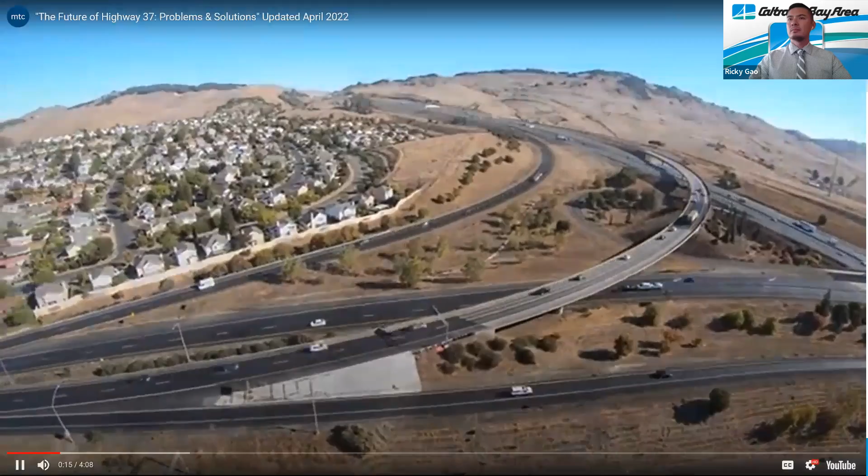Highway 37 is a critical piece of the Bay Area mobility puzzle. The 21-mile corridor connects Solano County cities and some of the most affordable housing in the Bay Area, with jobs in Napa, Marin, and Sonoma counties. Yet, the route is challenged by issues of congestion, flooding, and sea level rise, as well as limited access for bikes or pedestrians. Even during the COVID-19 pandemic, traffic flow on Highway 37 is routinely pinched by a 10-mile bottleneck.

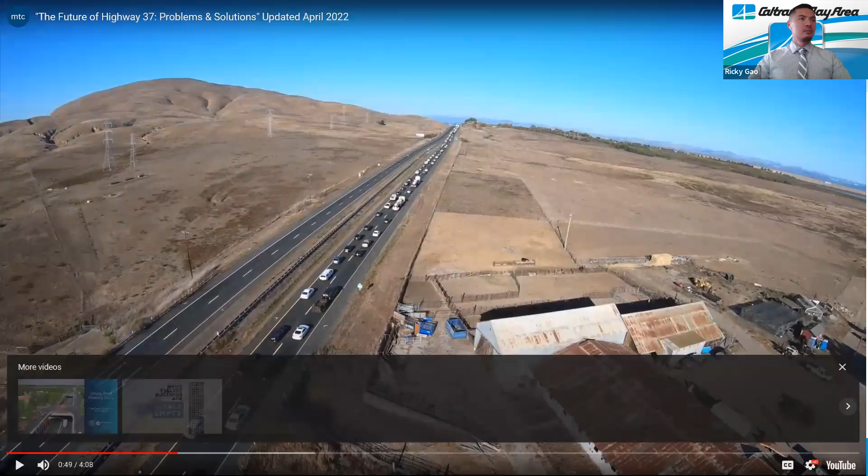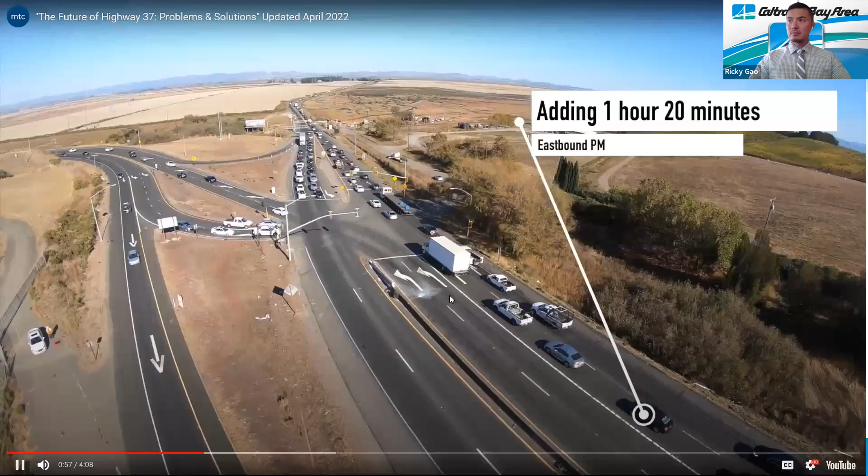This stretch in particular, from Sears Point to Mare Island, has one lane in each direction, separated by a concrete barrier, meaning westbound traffic backs up in the morning, adding up to 30 minutes to the typical commute and impacting Vallejo streets as drivers divert through Mare Island. In the evening, eastbound traffic backs up from Sears Point to beyond Lakeville Highway, adding as much as an hour and 20 minutes to commute times for some drivers, and extra safety problems for drivers who have diverted onto Lakeville Highway.

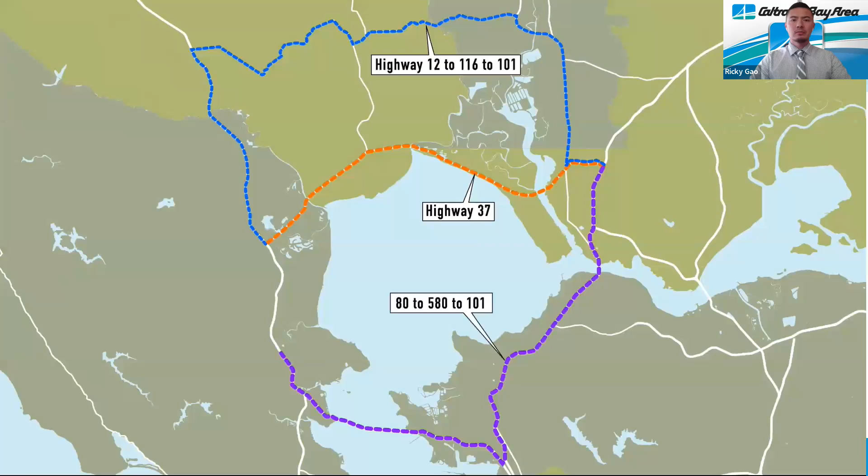There is no easy alternative to Highway 37. As you can see in these two existing options, drivers forced to detour north or south would have to travel twice as far to get from Vallejo to Novato or vice versa. A commitment to equity requires a reliable link between the comparatively affordable housing in Solano County and job markets to the west. And Highway 37 can be a viable route for future transit service only if buses can avoid congestion.

The situation can be even worse in the winter. Existing levees protect the low-lying highway from everyday flooding, but heavy rains and king tides can shut down the entire highway, as happened for 28 days in 2017 and for 8 days in 2019 due to flooding at the Novato Creek crossing. Rising sea levels will require a permanent long-term solution, but the Highway 37 team already is working on short and intermediate term improvements to ease congestion and reduce flooding risk.

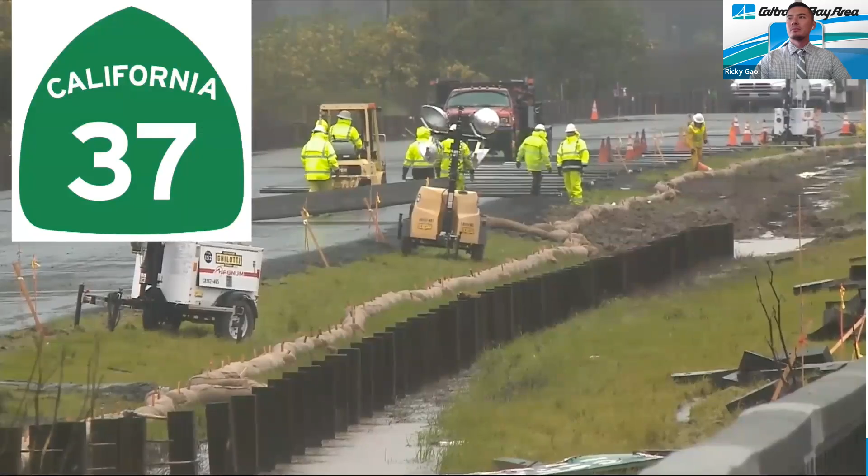On the Marin County end of the corridor, crews already have raised the pavement elevation, built concrete flood walls along critical segments of Novato Creek, installed new drainage systems, culverts, and slide gates, and acquired inflatable rubber bladders and portable pumps for deployment before major storms.

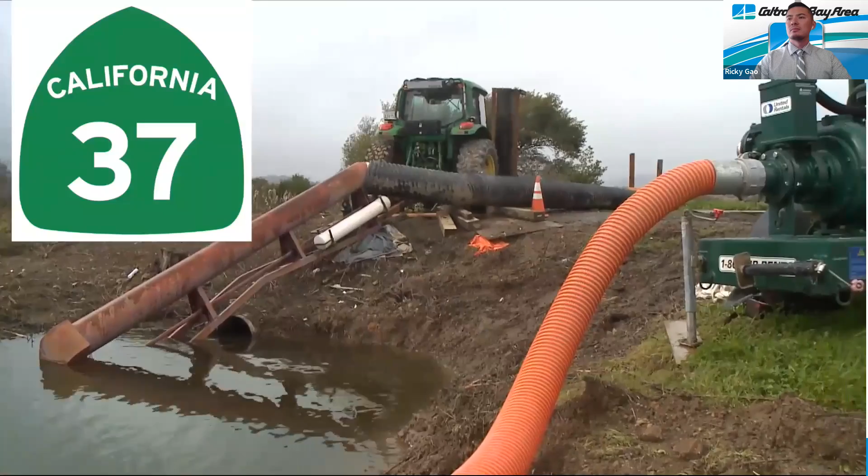Work set to begin soon includes more paving and repair work, mowing and weed abatement. The Highway 37 team is also looking at options for reducing congestion in the 10-mile bottleneck between Sears Point and Mare Island. These include a 3-lane highway with movable median barriers for a carpool lane that operates westbound in the morning and eastbound in the evening, and using the current shoulders for either part-time or full-time carpool lanes in each direction. It would take about 4 years and cost $250 to $400 million.

Challenges include avoiding impacts on sensitive wetlands and minimizing the use of any bay fill. The other big issue, of course, is money.

For both near-term improvements and congestion relief for the Mare Island to Sears Point segment, and a long-term project to completely transform Highway 37, tolls may be a practical solution that can serve as a match to secure other regional, state, and federal dollars. State Senator Bill Dodd, whose district includes nearly all of the Highway 37 corridor, in early 2022 introduced legislation that would authorize tolling on Highway 37 and would require toll discounts for high-occupancy vehicles and for lower-income drivers. What do you think are the right solutions for the Highway 37 puzzle?

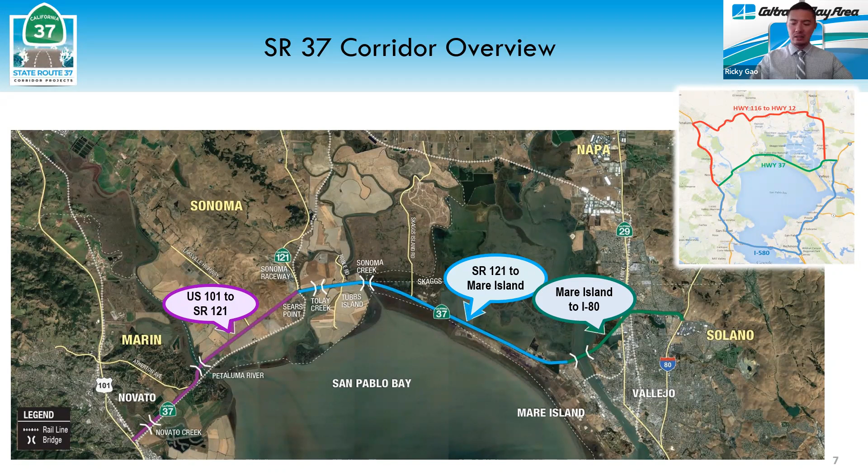And also we have a congestion issue because of the low-income communities in Vallejo and a lot of working-class travelers going through SR 37 to work in the Marin, Novato area. So there's a very high volume of traffic in the peak period causing congestion, as well as we have ecological opportunities to restore some of the lands and add connectivity to ecological sites.

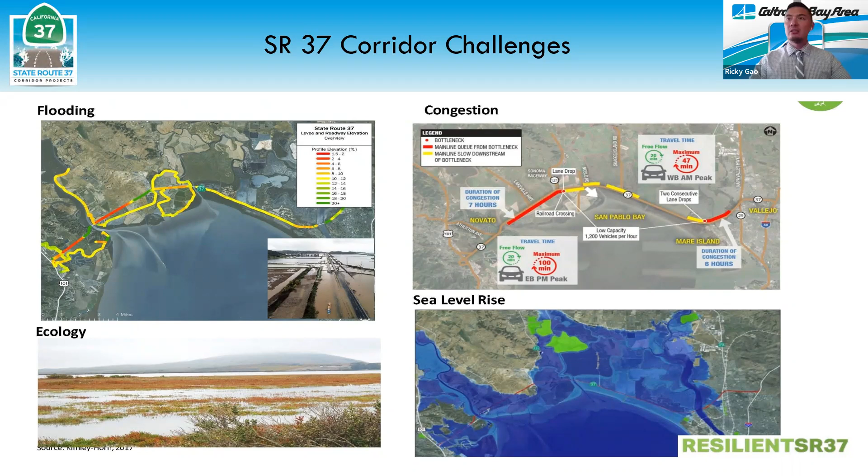So we'll try to address all the challenges in a phased implementation, as you can see on this slide. First, the team has identified several projects to deliver early benefits to restore SR 37 to a better state, from reduced flooding, to addressing congestion relief by adding transit and carpool for the Sears Point to Mare Island Improvement Project, SR 121 intersection improvements, and other smaller projects. And also we will identify ecological and Bay Trail enhancements.

Once we have done all these near-term projects to deliver early benefits, we restore SR 37 to a better state to buy us some time until 2040 or the mid-21st century for the SR 37 ultimate project, which will deliver advanced mitigation resilience to sea level rise and flooding, add bike and pedestrian multimodal transit, and also address public access and equity.

So these are the 5 benefits the ultimate project will deliver, and the ultimate project will come after the near-term project. So that's the phased implementation that the team is taking.

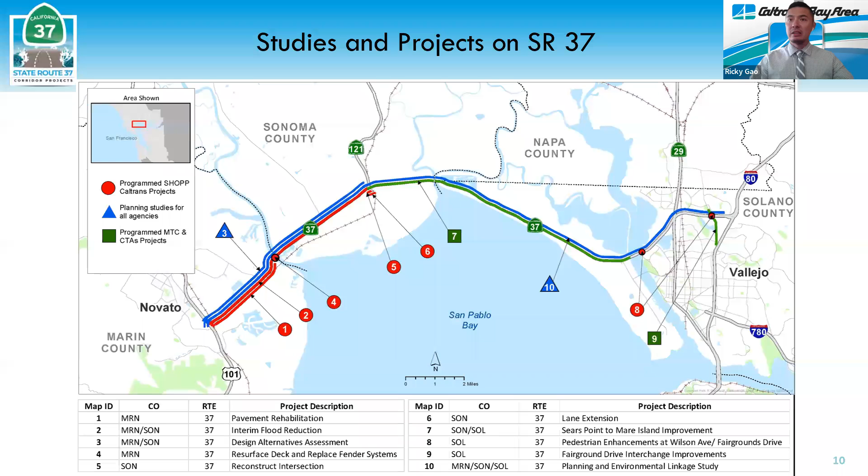I'm not going to go into the details of all the projects, but we'll mention the major ones in the next few slides, specifically the flood reduction project, the Sears Point to Mare Island project, and also the planning and environmental linkage studies spanning across the entire corridor.

So with that, I'm going to give it to Tammy to talk about the planning and environmental linkage study. Thank you, Ricky. Hello, everybody. The planning and environmental linkages study - go ahead and go to the next slide. Sorry about that, Ricky.

The planning and environmental linkages study is a federal highway initiative, and it's used to bridge the gap that often occurs between planning and the environmental review process. Caltrans is also incorporating CEQA agencies into the PEL process, and I also wanted to let you know that Caltrans, in coordination with MTC and the 4 North Bay County Transportation Authorities, are completing the first PEL on the state highway system in California. So it's very exciting to be doing this for the first time in our state.

The PEL study is considering the entire corridor with connections at 101 and all the way over to Interstate 80. There have been a lot of studies done, but they haven't encompassed the entire corridor. So that's what we're working on here.

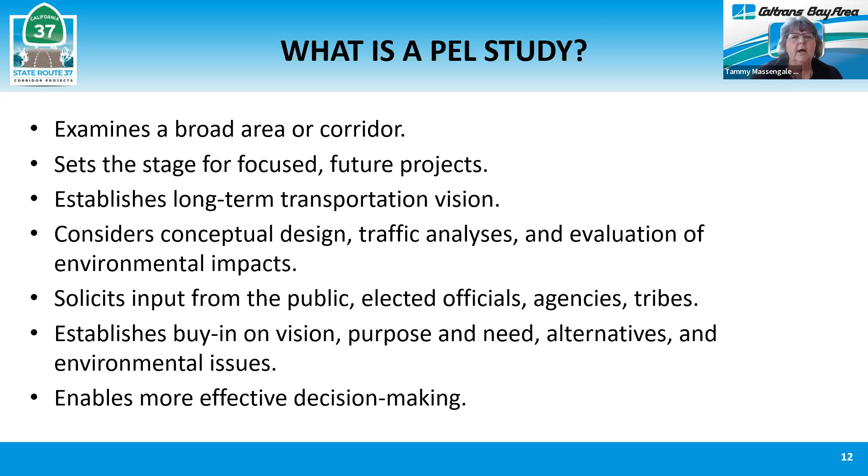Our PEL study will consider the ongoing projects in the corridor that Ricky mentioned, and the numerous studies that have been previously completed for the corridor, and we will incorporate those studies as appropriate. The unique thing about the PEL study is it actually has an implementation plan, and that implementation plan will provide a framework for streamlining the transportation improvements, the funding that will be needed, and also identifying requirements for future CEQA and NEPA documentation.

One of the studies I'd like to highlight is the MTC-sponsored Ultimate Sea Level Rise Design Alternatives Assessment from US 101 to State Route 121. This recently completed study looked at a range of alternatives on the western portion of the corridor, and using guidance from the Ocean Protection Council, they've designed the project to meet sea level rise for the year 2130, which is also the horizon year that we are looking at for the PEL.

There were three alternatives that they looked at in the study: an elevated causeway, an embankment, and a combination of an embankment and the causeway. The team assessed the alternatives against 23 different criteria, and they used a lot of input from their environmental technical working group, the resource agencies, and stakeholders.

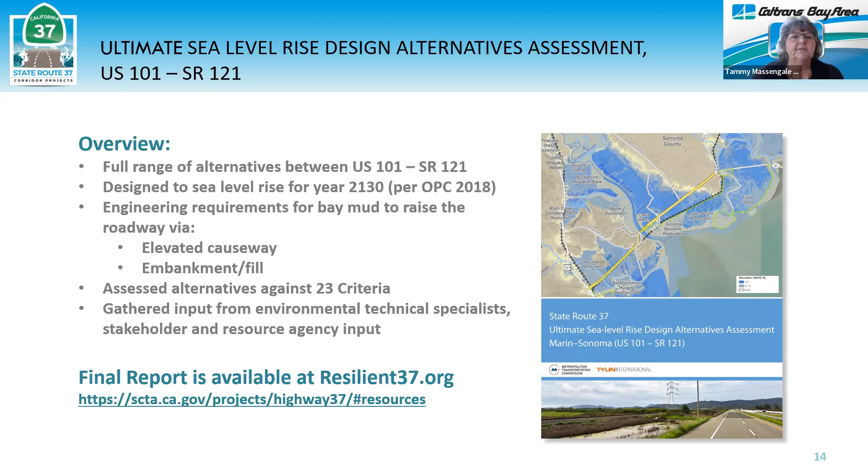Lastly, we have established evaluation criteria. As a side note, during this time, both the DAA and the PEL used the same purpose statement, so we worked together collaboratively so that we would be looking at the same type of results, if you will.

Since October, our technical working groups have been refining the evaluation criteria. We have developed the alignments that we're going to show you in just a little bit. And on January 25th, we held our second public meeting where over 300 people attended, and of those attending, about 260 were from the traveling public, which was very exciting for us.

Our next steps are to finalize the screening criteria and run the alignments through the screening process.

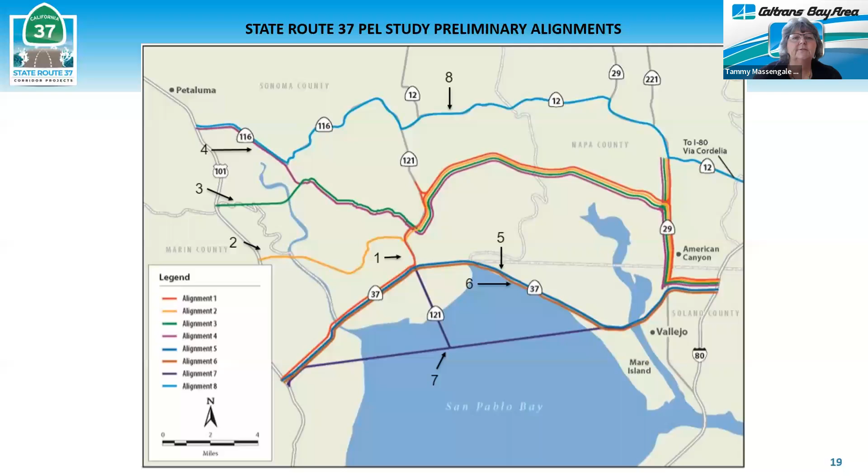During the technical working group meetings, there was a lot of discussion regarding Alignment 7. The main theme was the feasibility of building this type of structure over the bay. Since the alignment meets the purpose and need, it will be retained through screening criteria 1.

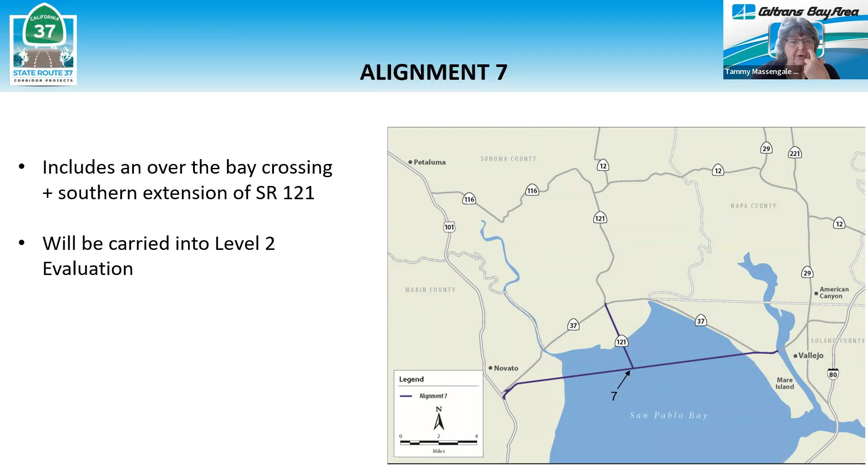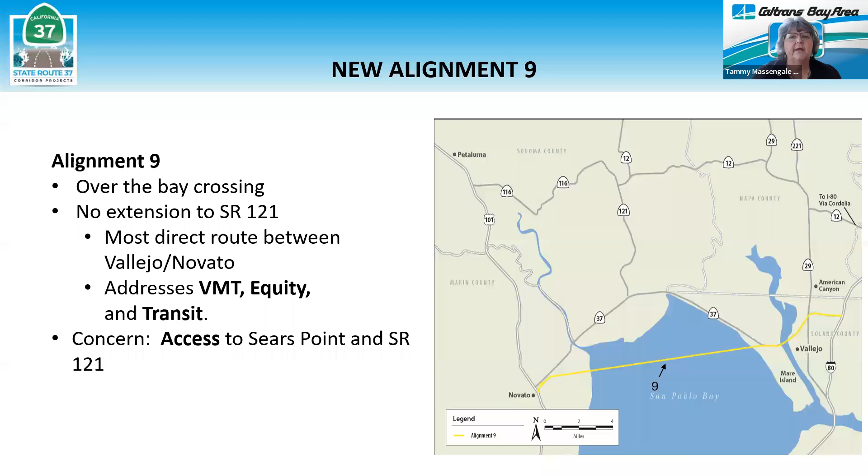As part of the discussion on Alignment 7, the recommendation was to add a new alignment to the current list that is exclusively a bay crossing. This idea had a lot of support since it would be the most direct route between Vallejo and Novato. In addition, it would reduce the number of vehicle miles traveled, focus on equity, and would be the most direct route for bus service and SMART. The con of this alignment is the access to State Route 121 and Sears Point.

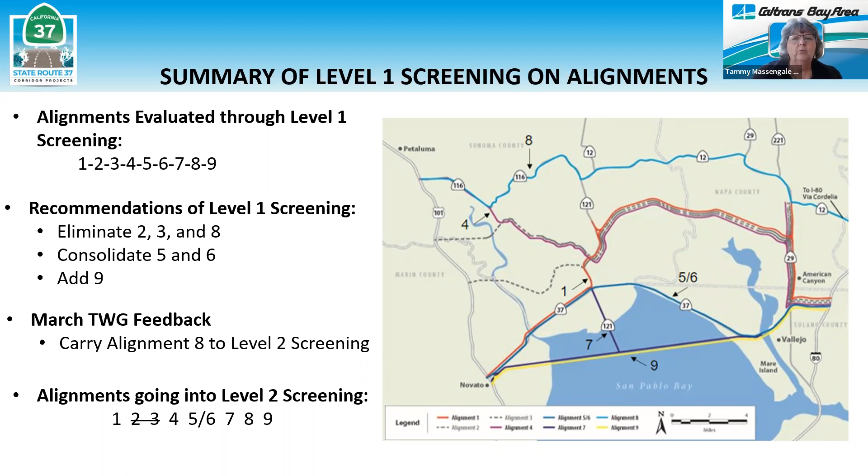Following the March technical working group meetings, alignment 8 will be retained and moved to level 2 screening. The reason for that is we had a lot of input from our resource agencies asking us to look at an alignment that completely gets out of the wetlands, and alignment 8 is the only one that does that. So with that being said, alignments 1, 4, the combination 5, 6, 7, 8, and 9 will move to level 2 screening.

These are some of the additional modes that Caltrans will consider to be part of the various alignments. Many of these modes would have the potential to increase person throughput, such as buses and rail. In addition, you will see that both floating bridges and ferries have been crossed out. These two modes were eliminated during the level 1 screening process.

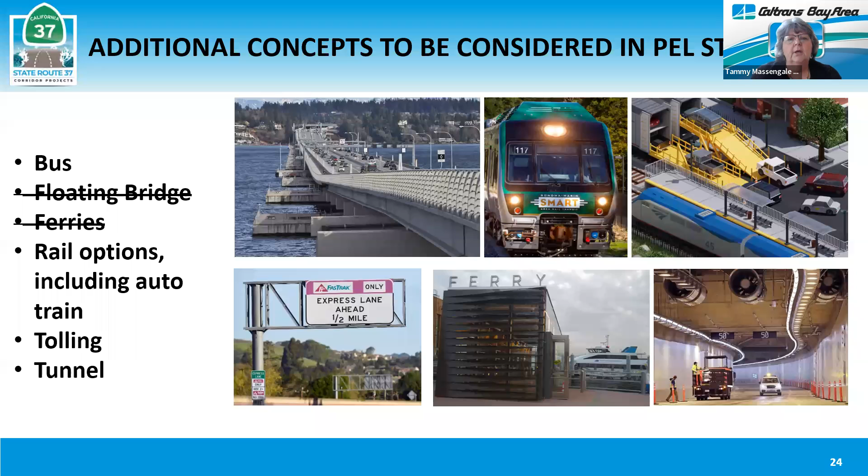I will turn it over to Jeanette to discuss the Sears Point to Mare Island Improvement Project. All right, thank you.

As previously noted by Ricky and in the video shown earlier, we are moving forward the State Route 37 Sears Point to Mare Island Improvement Project, shown here in blue, extending from State Route 121 in the west, east to Mare Island in the east. This is the area where, as previously noted, State Route 37 drops from 2 lanes in each direction to 1 lane in each direction. As a result, there's substantial congestion during particularly the commute periods in the commute direction, but also during events.

This project aims to address that by providing the benefits of transit in the corridor where it currently is non-existent. So the project proposes to implement transit and also to more generally prioritize high occupancy vehicles, with the goal of ultimately providing greater travel time, reliability, better flow of people, vehicles, and freight through this corridor. But I'll also note that this project is needed in order to support sections of the roadway that are currently settling and are at risk to flooding as a result of that. It's also a means of moving us forward to the ultimate sea level rise adaptation project, and I'll talk a little bit more about that in a moment.

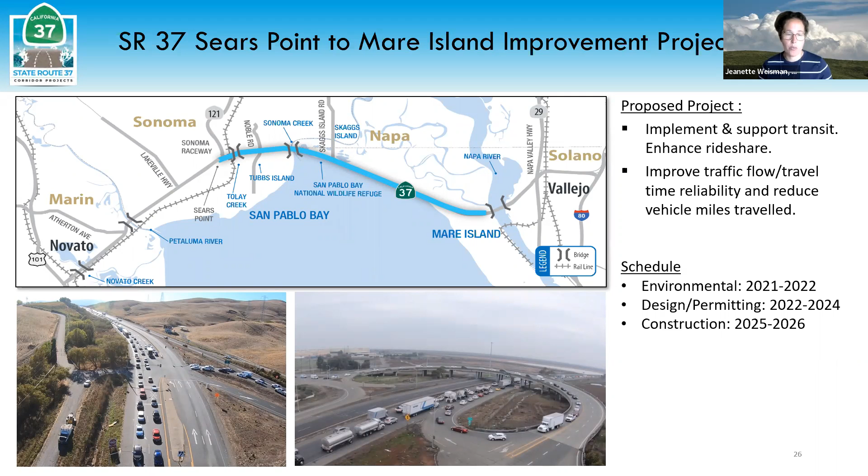So we are currently in the environmental phase of the project. We had a draft environmental document that was circulated this past January and February for comment. Now we are moving towards a final environmental document targeted for this late summer, early fall, looking at a September final document if possible this year. Then we'll be moving to the final design and permitting stage for the project, and then into construction, hopefully in 2025, with the goal of opening, or reopening, the section of the highway with the improvements by 2026.

This is a slide that shows the alternatives that we circulated as part of the draft environmental document in January and February. That was the environmental impact report and environmental assessment. The project aims to make the previously stated benefits, the improvements to travel times, and to be able to successfully implement transit by adding an HOV lane. The three alternatives that were considered as part of our draft environmental document are shown here.

Alternative one is a movable barrier scenario with the HOV lane moving and changing directions based on the peak commute direction, such that it would be 2 lanes in the direction of peak travel, that would be AM going west and in the afternoon going east on State Route 37.

Alternative 2 is a part-time HOV lane use of the shoulder, and that shoulder in the direction of the peak traffic flows would be used for commuting, making it a 2-lane configuration, while the other direction would just be a shoulder.

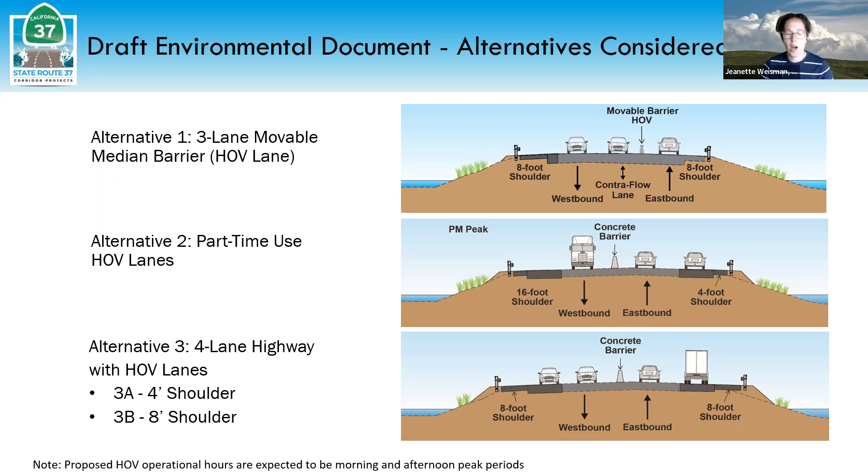And then they all would include, this project will include transit, money for transit implementation and operation. I'll tell you more about that in the next slide.

So we have some programs in place that we will be tying into this, which offer discounts for those first and last mile connections, and also an existing guaranteed emergency ride home option for people to utilize where their schedules change and they need to be able to get back in instances of emergencies and other purposes, so that we make the commute a viable option for those that need or want to take it.

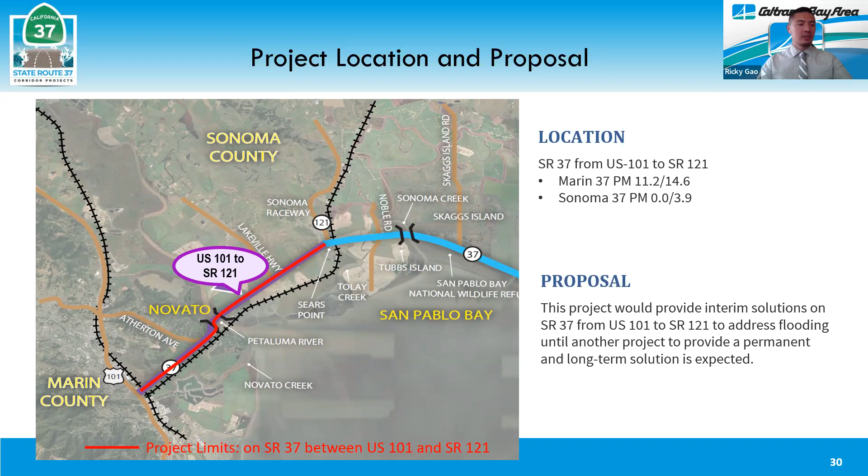Please note that as the project develops, most likely it will lean towards addressing the flooding in the most vulnerable segment of State Route 37 in Marin County, where the historical flooding happened in 2017 and 2019.

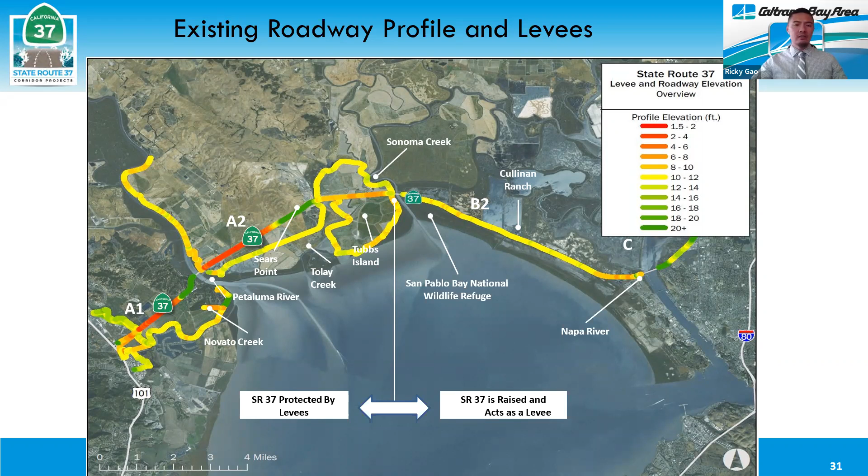So because of the low elevation, especially in Marin, we had flooding and closed 37 in 2017 when there was a historical rain event during the winter. The levee breach flooded SR 37 and closed the roadway for 28 days, as the video mentioned.

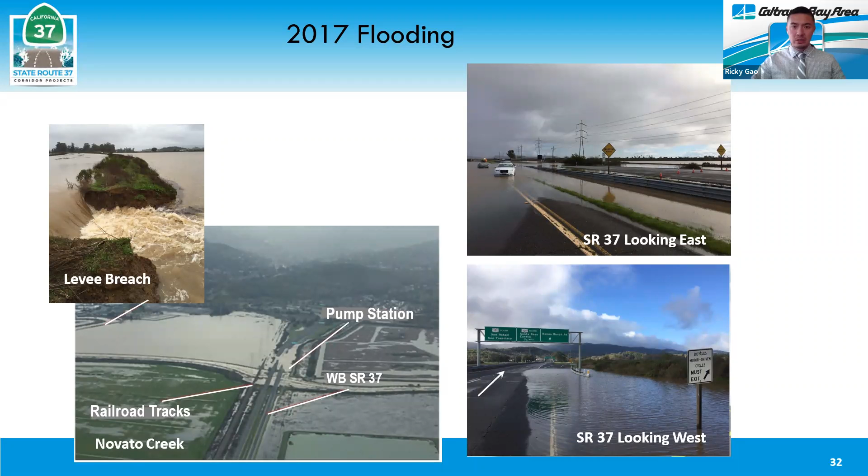Here are some pictures taken from 2017. Similarly, in 2019, there was another historical event that caused the levee breach to overtop, and SR 37 was closed for 8 days in 2019.

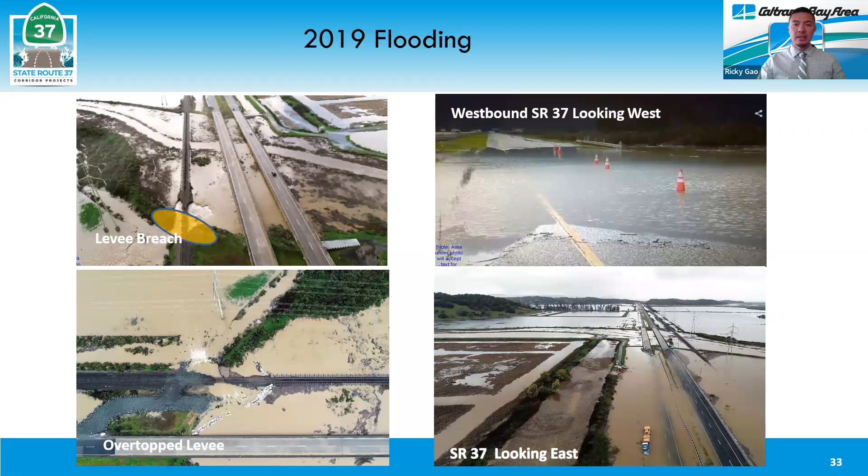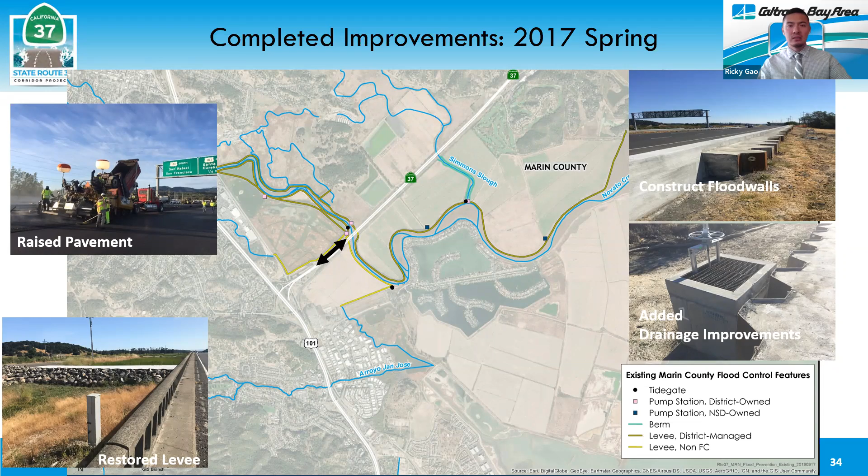Because of that, Caltrans partnered with local agencies and made quite a few improvements through emergency projects, including raising pavement, restoring levees, constructing flood walls, and adding drainage improvements in both 2017 and 2019. These improvements have been quite beneficial.

And so far, we have not had the flooding since 2019. However, the emergency projects are band-aids, and we still need a project systematically addressing the flooding and sea level rise. That's why we are studying the flood reduction projects.

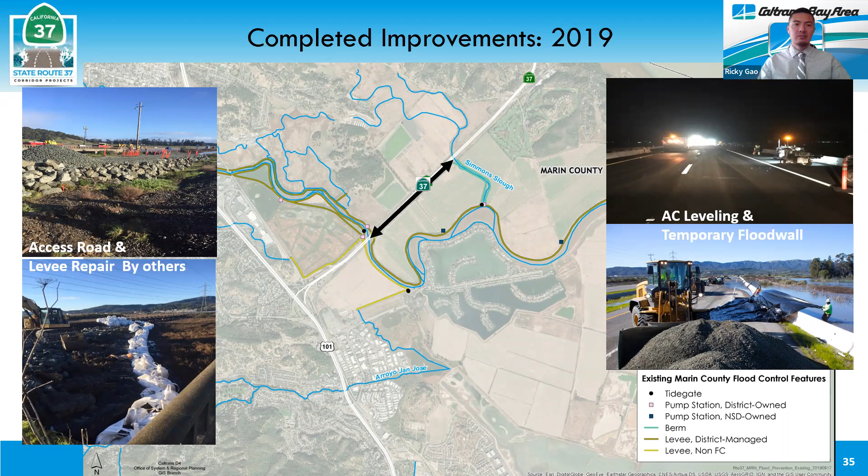The flood reduction project began its environmental studies in summer of 2021, and a scoping meeting was held in November of last year, where a lot of good comments were collected from the public as well as resource agencies. Currently, the project development team is studying the alternatives, and we are preparing the draft environmental document for circulation in fall of 2022, targeting completion of the environmental phase in 2023, design completion in 2026, and beginning construction in 2027. Design and construction targets are pending on funding availability.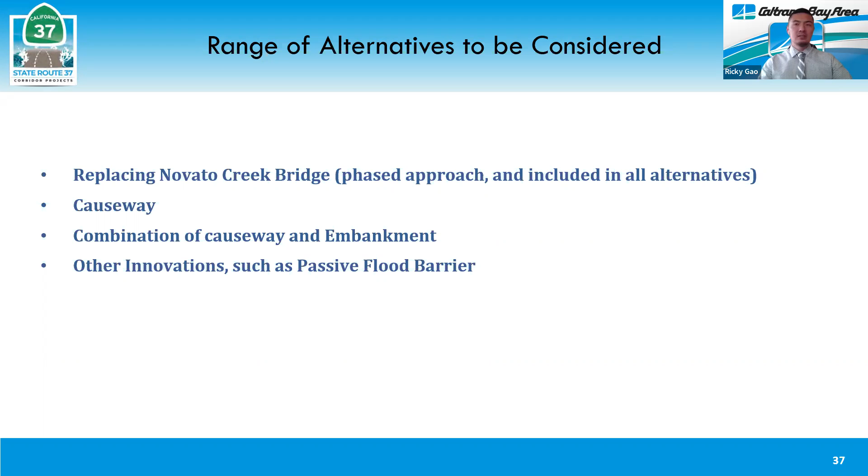So that's the flood reduction project. We also have two websites: one is resilient37.org, and the other is SR37corridorprojects.com. Both websites have a lot of information regarding SR37 studies, projects, and programs, as well as event information and records from past events and meetings. Please check them out - you can also leave comments through both websites.